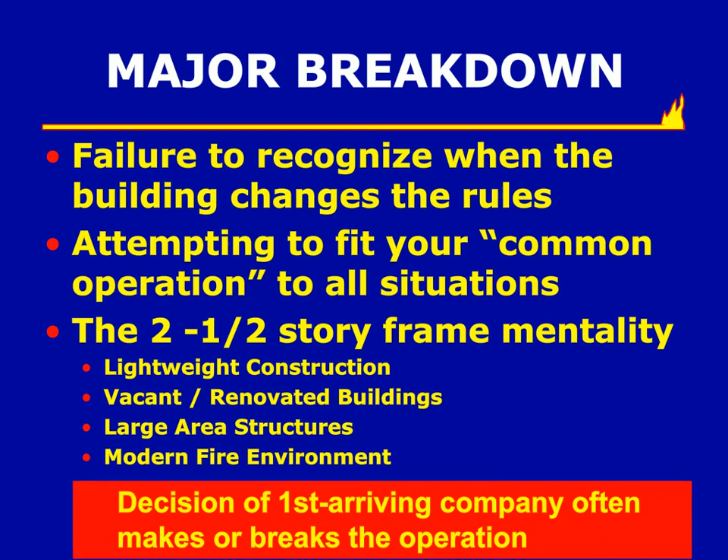So one of the things we have to be aware of, and you might be a chief officer and understand all these things, but you're not going to be the first one on the scene. So your first arriving company officer is the one that's going to have to recognize this, and his decisions are going to make and break the operation. I like throwing little sort of pull quotes out, and this is one that I really like. Doing things the same way all the time might get you killed some of the time. Your job as a fire officer and a firefighter is to recognize the buildings that change the rules of the game.

So now how do we start to recognize this? We want to do that before the fireground. And one of the tactical breakdowns that occurs is a failure to familiarize with your district. Construction, especially renovation. I mean, you should see these things when they're happening in your district, unless you're turning a blind eye or you're more interested in your cell phone in the jump seat. Get inside these buildings, take a look at them. For instance, we're going to look at this building here.

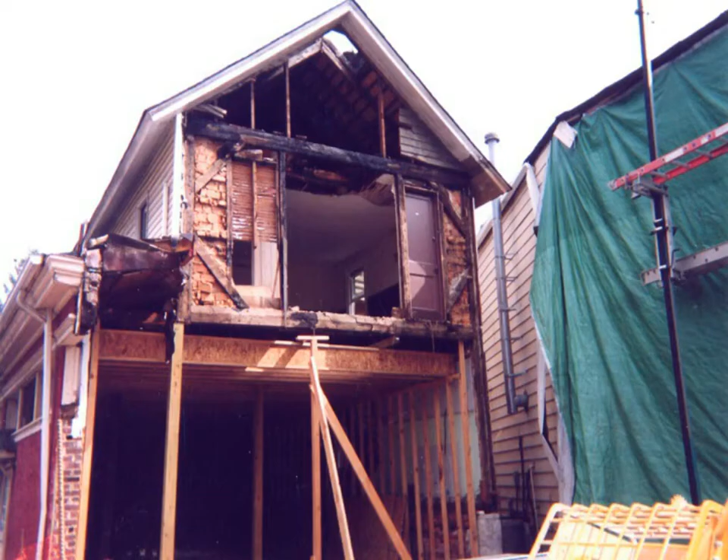However, if you had looked at this building before the renovation was in place, you would have seen that the back of the building and the front of the building is attached to what we're looking at right here. The back of the building had a fire. It was a brace frame building, and the second floor is now being held up by wooden I-beams. So, this sort of changes the rules of the game.

If you knew this because you were looking at these buildings while they were under renovation, it would be part of your awareness program and your pre-fire planning. This is critical that you know, because of an aggressive interior attack in a building like this now, with fires impinging on those things. And by the way, if we just look back at the slide before, that whole front area right here, that's all lightweight wooden I-beam.

And so the back of it, just seeing what was happening there, you have to recognize that and know that's a building that changes the rules of the game. You go in there with an aggressive interior attack and the fire is impinged on those wooden lightweight components, you may be wearing part of that building. So, again, you have to be on top of this in your jurisdiction.

Other things to look for. Renovations.

Waiting for our slide. Oh, let's push it to the audience here. There we go. All right.

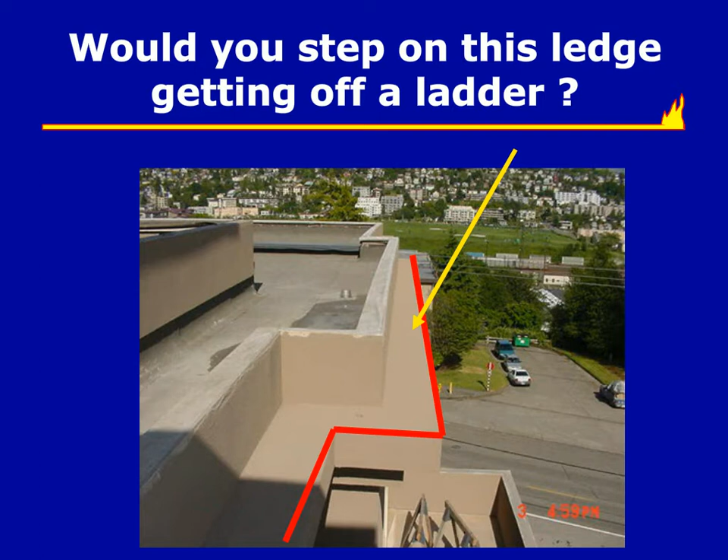All right, so let's move on. The next thing we got to look at is, what are they putting in these buildings these days? And this, again, isn't only old buildings, could be new buildings, could be renovated buildings, but you look at this here and you look at this ledge and you say, well, would I step off a ladder onto this ledge? Well, you might, except when you take a look and see what it looked like before it was painted over, it's actually styrofoam.

And styrofoam will have a toxic hazard because it doesn't burn, but it melts. It gives off toxic gas and it drips. But it's not going to support you. So one of the things you got to be thinking about is paying attention to when you put the ladder up. When a ladder hits that styrofoam, it's going to sound different than when it hits a normally solid wood roof or whatever. And this stuff's being used in a lot of different places out there.

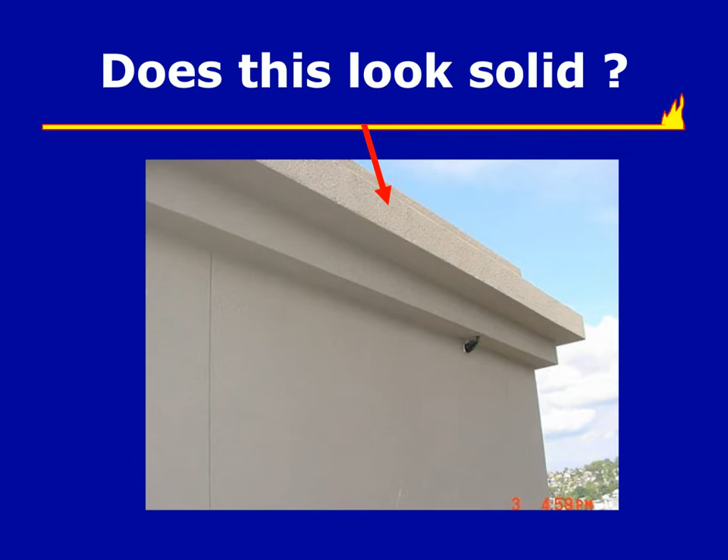And again, this changes the rules of the game because if you get off the ladder in there and step on it, you're going to fall. So you have to be aware of that. All right, some other things we're going to look at. Now, this is something that you want to take a look at when you pull up and you do your size up. You look up above that roof, you see what appears to be a pretty large parapet wall. And in reality, what you got to be thinking there is, what's being hidden back there? Right? Why is that wall there when it was never there before? Again, seeing that go up, you'd want to do some investigation.

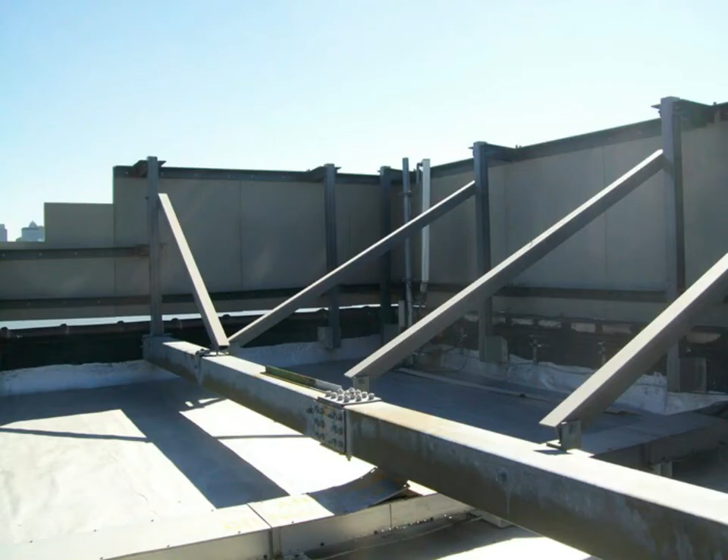And what are we looking at? We're looking behind the wall now in the next picture. All right, now we're behind the wall. You can see that wall is not brick at all. It's actually some flimsy sort of panel board. I could probably throw a good taekwondo kick right through it, back kick.

But this here, if you look at it, this is all HVAC equipment that's laying up and all over this roof. So what was happening in some of these buildings was they were not allowing them to put the HVAC equipment directly on the roof because of the roof load, and if a fire got through the roof, it caused the roof to fail a little earlier. So they came up with the brilliant idea to put it on an I-beam and then mortar the I-beam into the parapet wall. The unprotected steel I-beam that is susceptible to expansion from heat into a freestanding wall that is susceptible to collapse to begin with. So you see what these renovations are doing to your buildings.

So let's take a look now. Now, this was in Weehawken. In Weehawken, they don't allow this anymore. But up in North Bergen, which is, again, one of the cities that we protect, in North Hudson Regional, we cover 5 cities. We cover North Bergen, West New York, Weehawken, Union City, and Guttenberg. We have about 70 or 80,000 people a square mile. We never have a fire without an exposure problem. It's always rush hour. So it's always a challenge.

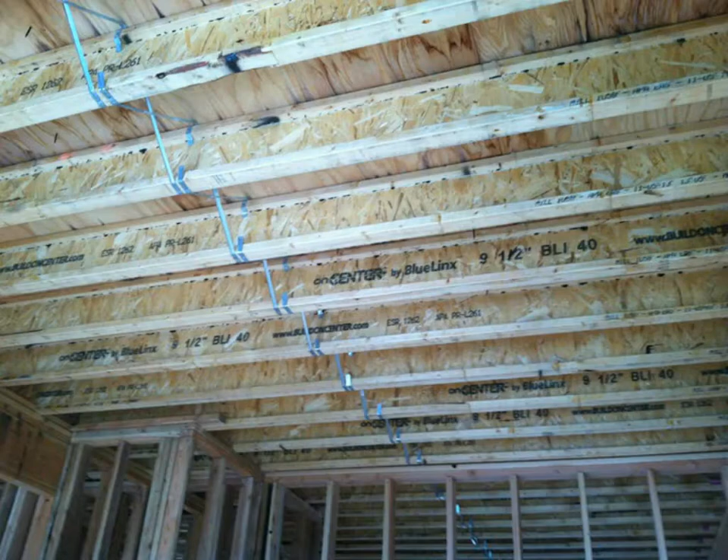And that building has since been renovated, and this is what we have now supporting the roof of that building. I don't know if you're seeing this. There we go. So we had very nice, solid wooden joists in that roof in the beginning, before the fire, and this is what we have now. The entire roof is constructed of wooden I-beams supporting, this actually looks like plywood. Most of the time it could be particle board, but this looks like plywood.

Anyway, again, not knowing your buildings, another top floor fire, maybe we can't work on a roof for 40, 45 minutes like we did in the previous fire. In fact, not only maybe, but we can't work on that roof. And again, you got to know your buildings. So you get a fire in a building, 99% of the time, if that building's not going to be demolished, they're going to be renovated with lightweight materials, and it's your responsibility to be out there and take a look at that. All right, let's move on.

If your department doesn't have an SOP on this yet, you should get one. You don't want to wait until the fire to try and figure out, well, what should we have done? You want to be looking at what we can do and what we should be doing way before thinking about what we should have done. So you want to adopt an SOP in regard to solar panels. I have a little blurb on this here that I got through one of our captains. I'm not sure where he got it, but it's some pretty good guidelines to utilize operationally.

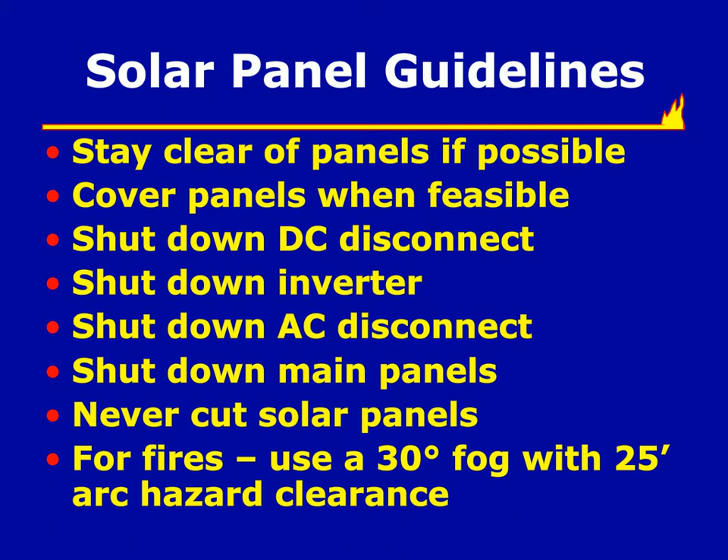So one of the things we did there, same thing with the 92nd Street fire, the alarms didn't go off there either because the fire was in a cockloft. What we did was we manually pulled an alarm just to notify everyone. Anyway, to us it looked like this fire was through the roof when we pulled up, and we struck a second alarm right away. We had the report of the smoke on the top floor,

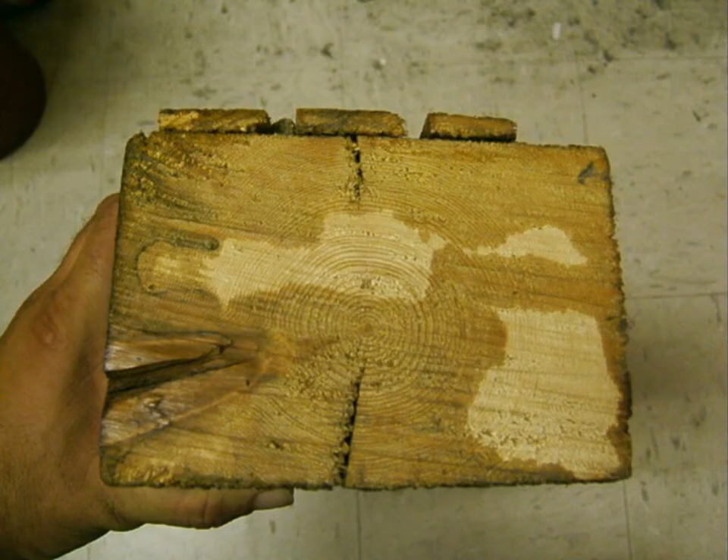All right, let's move on now. Now we're going to talk about another tactical breakdown: the failure to recognize or respect the presence of truss or lightweight construction. All right. Now the first picture we're going to see here is, and I always ask questions in my classes, which I can't do here, but this is a piece of wood from a brace frame building, and this building was well over 100 years old, almost 140 years old.

And if you look at this piece of wood, the rings are really tight. The wood's got a lot of mass to it, and this is what they call slow growth wood. This is the way God intended wood. It grew in a forest, and it wound up in a building. But the thing about this, it happens to be a little bit wet, but there's very little moisture in this piece of wood. So any warping or anything that happened to this piece of wood has already happened,

And what's happening is this is what's in our buildings. And while it's in your buildings, it's drying out. And as it dries, it's warping and twisting, and it's being held up by suspect support mechanisms like glue and sheet metal surface fasteners or gusset plates or joist hangers. So these things may be becoming unstable even without a fire due to shrinkage and that sort of thing.

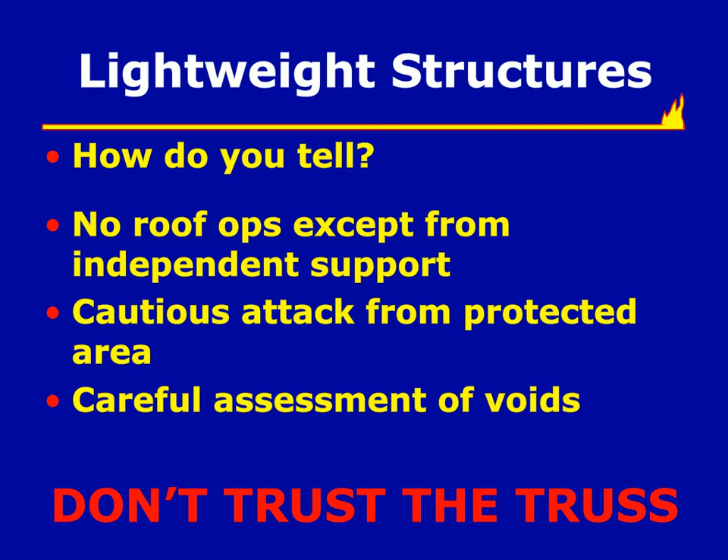If the answer is yes, now our next question is: is it involved or is it threatened? And as an incident commander, you probably can't see that. You maybe can see it if there's smoke coming from voids or something, but you need reports. Now, if the answer is no, we're going to increase supervision, put chief officers inside. We're going to operate cautiously, continue to monitor the voids, and reinforce the operation based on conditions.

If it is involved, we are then going to withdraw from the area or the building, and we're going to prepare for a collapse. Now, that doesn't mean we have to lose an entire condo complex. That means we're not going to work in the area of origin. We can consider a stop point based on where the fire is, the building layout.

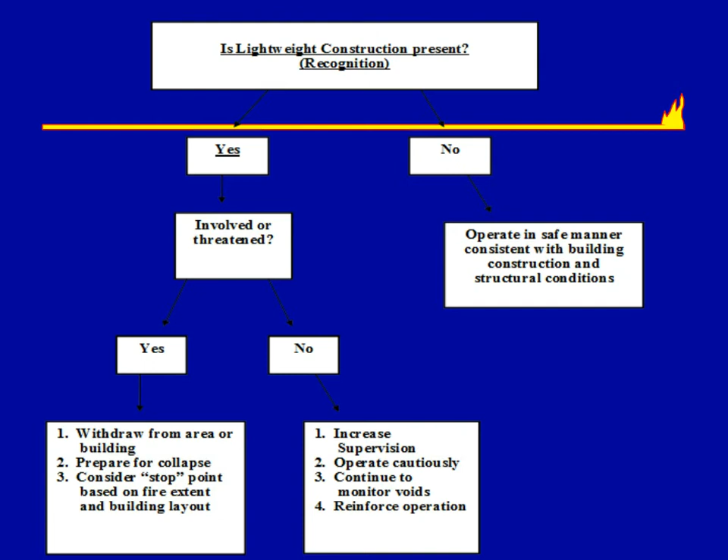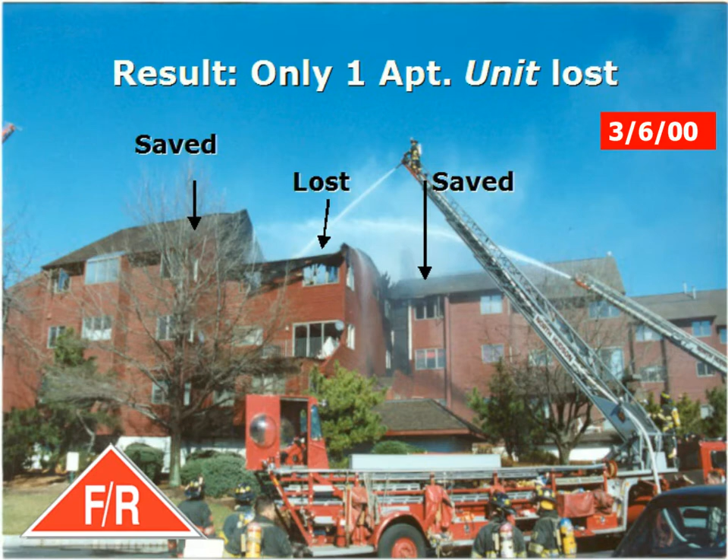And what I saw was 3 floors of heavy smoke with fire breaking through the wall on the D side of the building, between the floors. So right now we're looking between the floors. That's a void. I know that's a void, so we immediately have to start thinking this is going to be very similar to the fire we had the last time. And I basically used the same strategy there, right?

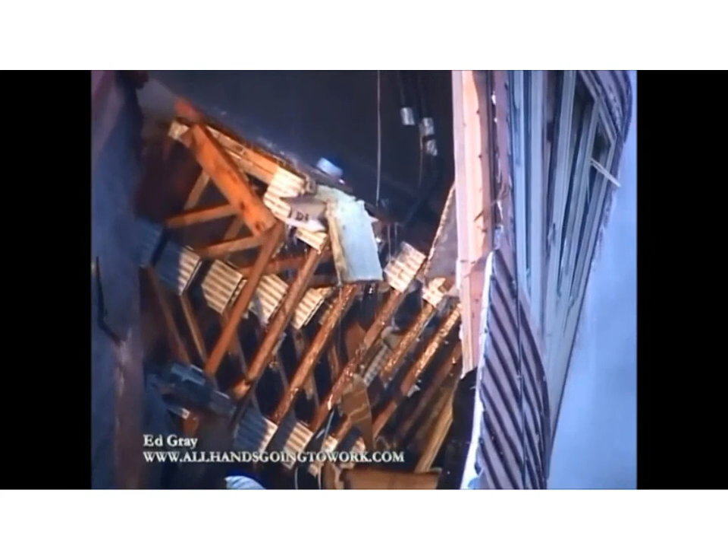Sorry to interrupt. The audience cannot hear you. Sorry about that. Okay. No problem. Can they hear me now? Yes, sir. Let's move on.

All right. Before I get into wooden I-beams, I just want to talk about that video a little bit. You could see how that building collapsed. We already had sort of a lean-to collapse on the second floor, and you saw how the third floor collapsed and just dropped 3 floors down to 2 floors. We weren't anywhere near that building. We were well out of that collapse zone. Again, we were pinching it off in the Delta exposure and the Bravo exposure, and it was successful.

It was successful, but the key to that is to continue to monitor your voids, because if the voids become involved and you can't keep that fire out of there, you're going to have to abandon those as well. All right, let's move on. Wooden I-beams. Again, Rock Harbor, which is that complex that we just looked at, was truss. A lot of the buildings being built today are also being built with wooden I-beams, which are definitely no better. They're used in floors and roof construction.

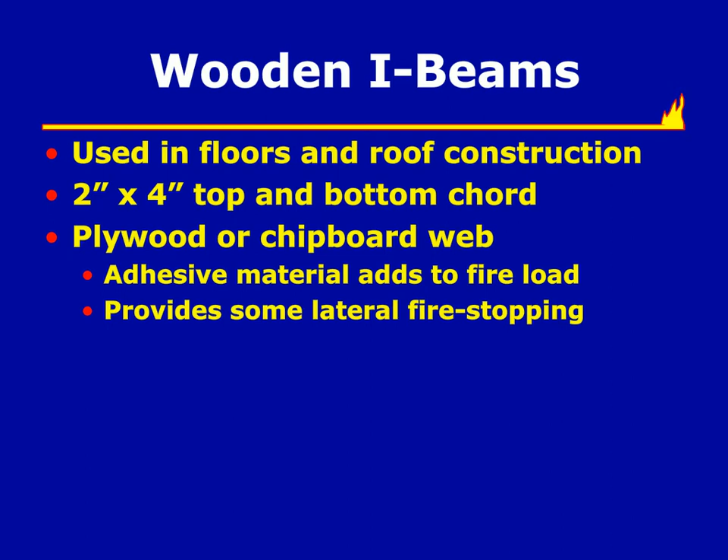They have a 2x4 top and bottom chord. Sometimes it's 1.5 by 3, more likely. Plywood webs are not being used anymore. It's more a chipboard or an OSB web. Now the adhesive material in there is going to add to your fire load. It's going to burn through very, very quickly, even though it does provide a little bit of fire stopping. Again, a 5-minute collapse potential on these things. I like to say they're nothing more than sawdust and glue being held together by 2 chopsticks, because that's basically what they are.

If you really want to take a look at them, the size of the web in the center, if that's a very big web, they're probably a little bit longer. Normally they're about 20 feet long, but these will collapse without warning. They will collapse without warning, just like the truss. It's not like a steel I-beam.

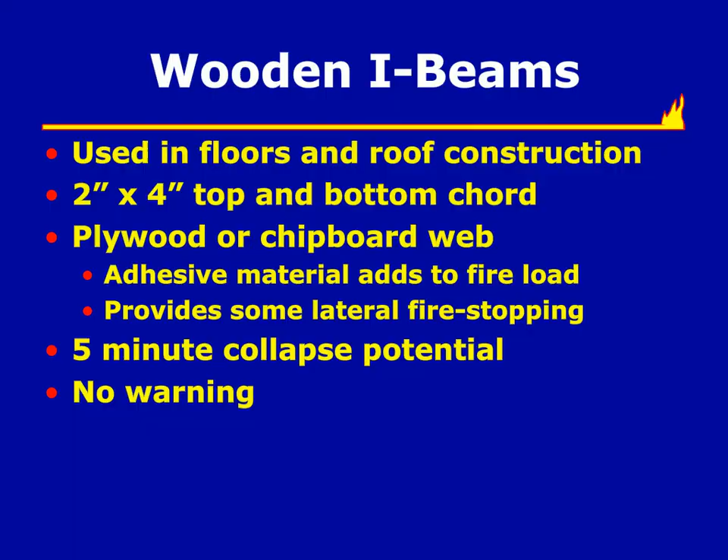And you have to take a look, what do we have in these buildings? Unfortunately, in New Jersey, and I don't know if it's this way in Florida or New York State, these don't require the truss sign because they're not trusses, although for us they're basically the same, right?

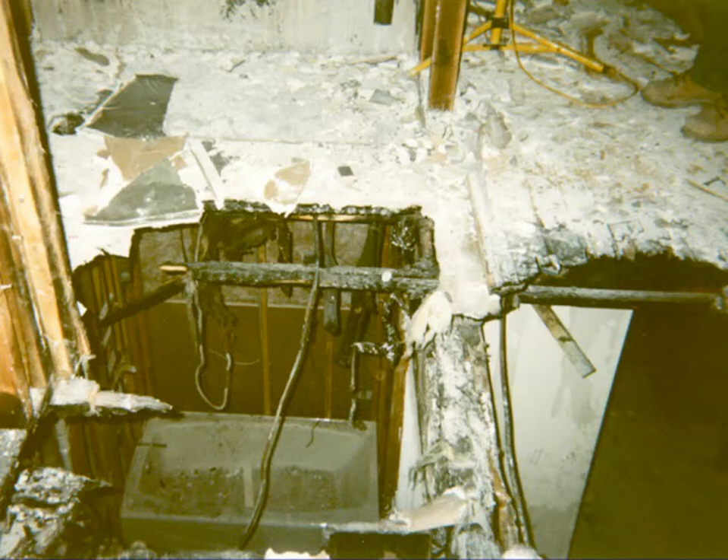This was a fire that we had in a building under construction, and this building had lightweight I-beams as floor supports. You can see the one directly in the center of the picture. There's one to the left, and there's another one that you can't see. There were 3 of these burned away before we even got on the scene. It was about a block from the firehouse.

It was a verbal alarm early in the morning, and for these guys, they did the right thing and they knocked it down from a distance, which is what you want to do. Knocked it down from a distance, and you could see the kind of damage that you had there. And there wasn't even any real floor loads on that just yet because the building was still under construction. So, wooden I-beams, they're all over the place. They're extremely, extremely dangerous, right?

And again, anybody who's got a little time in the business, you should have seen these things going up on your watch. So if you don't know what they're made of, shame on you. But these type of buildings, they are full of glue-based materials, and they burn like there's no tomorrow. Yeah, anybody who's had a fire in one of these buildings, you're gonna know that. Once the fire takes a hold of the structure, once you flash over and it gets in the voids, it's over. We don't save these buildings.

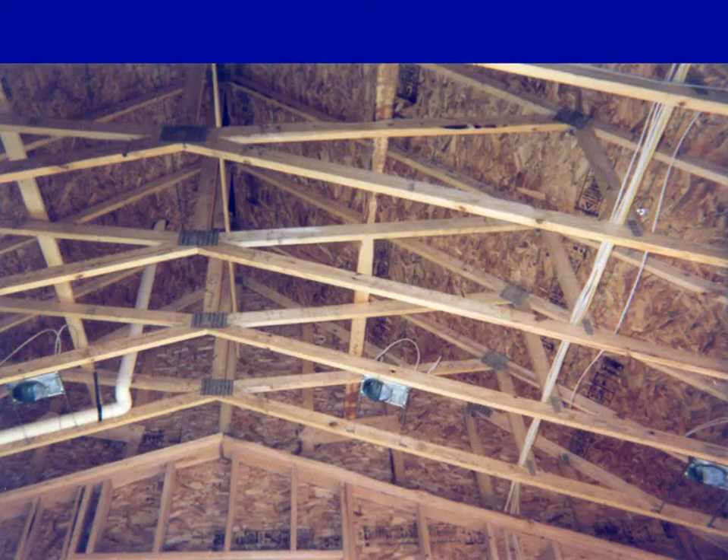I saw a video where a bunch of guys were in here too long and the whole back of the building collapsed, and fortunately for them, they rode the collapse out. But there have been other people that haven't been so fortunate, have been killed in these buildings. They're big buildings, they're large areas. You should be working in there with lifelines. You should be operating from protected areas, and you should be of the mindset that the building is completely filled with voids. And a fire that gets in any void is going to get in any other void in this building. Here's your cathedral ceiling void right here.

You can see the particle board roof, all right, up above. And here is another shot of it just from the side. And you can see that particle board. I mean, you look at that stuff, sawdust and glue. You know, if anybody's ever been in a flashover container, that's what we line the walls with. But you can look at all these voids in here. There are closet voids, there are chimney voids, there are floor voids, there are bathtub voids. They're all over the place.

You get a good fire in one of these places, and again, a lot of these are in areas where there are longer response times. Maybe they're not career departments, and it's an even longer response time. By the time you get there, unless there's an interior sprinkler system that didn't allow it into the voids, which is not necessarily uncommon. You know, these buildings, they're killers. They're firefighter killers. They're trusses, they're lightweight I-beams, and we don't belong playing in them for any long period of time.

The other thing that happens in these buildings is the top of the building, up in the attic. You never saw this in any other type of building unless it's been renovated, except in these newer buildings. Now you can see the trusses clearly, and they don't really look like 2x4s, do they? The key to these things will be on the outside. How many compressors do you have? If you have 2, 3 compressors, consider you're going to have a 2 or 3 zone system, and you want to ask the owner where these systems are.

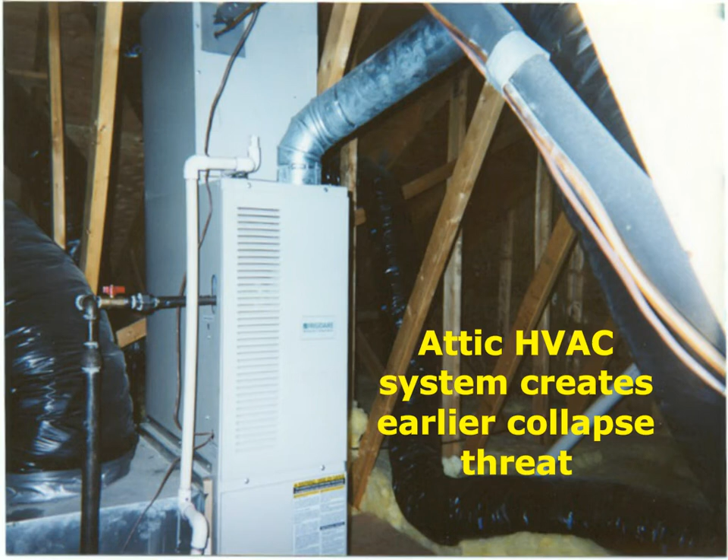You have a good fire on the second floor, and one of these things is up in the attic. It's pretty heavy. It could lead to a much earlier collapse. So, again, something we have to be aware of. This is, again, buildings that change the rules of the game. We can't fight fires in them like we normally fought fires in the buildings we have been working in for, you know, 100 years.

Steel truss systems. They used to just be in strip malls and warehouses, but they're not just in those anymore. They're using them in areas that we weren't used to seeing them in other times. And the other thing with these things, especially the trusses, it has to do with the codes. How did they get away with trusses? It has to do with the codes.

You have your specification code and your performance code. The specification code said that no matter what, you have to use a specific piece of material. So if we say you have to use an 8x12 solid wood joist, that's the only thing you can use in a specification code. But in a performance code, provided the engineering allows for it and the fire tests allow for it, you can use a piece of dog crap if it holds up, just like what the specification code would. That's why we're seeing all this weird stuff going on in our buildings.

And the other thing with trusses is, why do trusses fail in a comprehensive, domino type hazard? It's because they're engineered to only hold up the areas that they are holding up. Years ago, if you had a legacy roof, a nice solid wood joist roof or wood joist floor, and part of it burned through, that floor's not going to collapse or that roof's not going to collapse. That doesn't happen anymore because when one truss burns through, the ones adjacent to it are not designed to hold up the load of that truss.

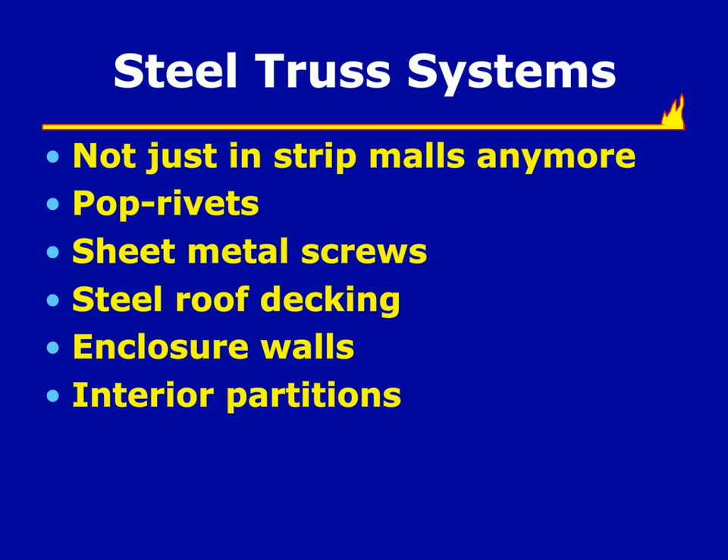Right? So these steel truss systems, they're using all kinds of weird stuff in these things too. Pop rivets, sheet metal screws. We're seeing steel roof decking in places you never saw it before. We're seeing it used in enclosure walls and also in interior partitions. Now, we're also seeing it in places we never saw it before, like private dwellings. These are estate homes, McMansions, whatever you want to call them.

But take a look at these things, and you know what the only advantage to this is? No termites. That's it. Other than that, this building is going to fail, not necessarily without warning. There'll be some warning because there'll be some sagging, but you can't expect this building to hold up under the fire load. The whole thing is exposed steel, and exposed steel is going to be weak at all times.

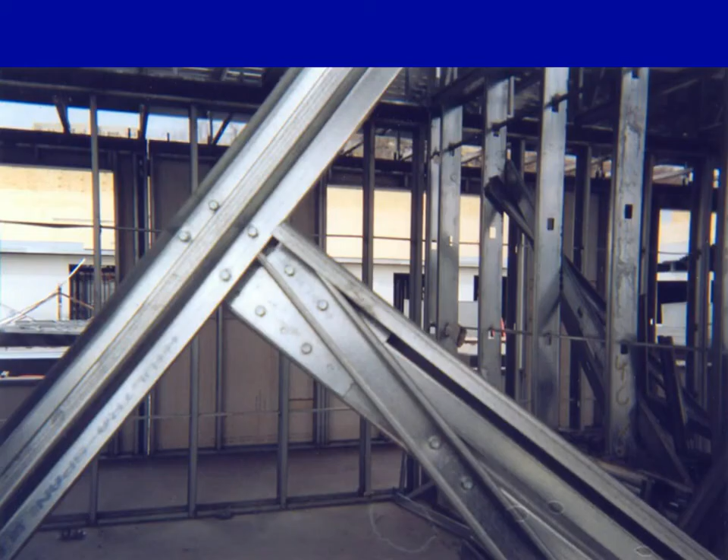Right? This was a townhouse going up in North Hudson, and you can see the interior partition walls of steel, very light gauge. This was one of the roofing structural materials in this building, and it was laying on the floor, probably about 25 feet long, and I could lift it with one hand, and it's just being held together there with those sheet metal screws.

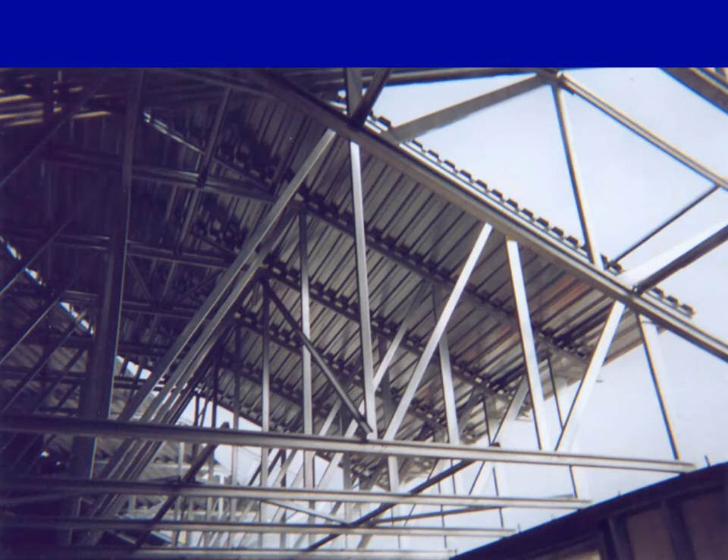And what they did with it was they put it up in the roof. You see it up here in the roof, and this is the first time I saw corrugated steel decking on a peaked roof. These are in condo complexes on the Hudson River.

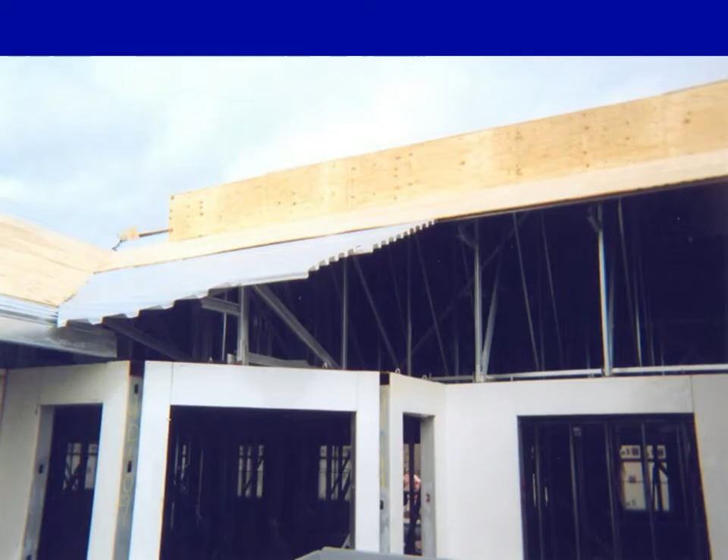We see it a lot more now, but this is the first time I ever saw it. And here's another shot of it here. But what they did was they just cover it with plywood, and they cover it with asphalt shingle, and it looks like any other roof. You can see the size of the truss loft in there, and look at how thin those steel supports are

for that roof. Again, these are buildings that if you don't know what's going on in these buildings, if you haven't seen them when they were going up, this just sets the stage for disaster when we try and fight it like we fought the 2.5-story frame. These are just dangerous, dangerous buildings.

And the other thing is, and this is what happened in Edgewater too, those voids up there are not sprinklered. We don't sprinkler the voids. Unless your code calls for it, which most don't, we sprinkler just the living areas, the common living areas. We don't sprinkler the voids. So just like what happened in Edgewater, once the fire gets into the voids, you got a big problem.

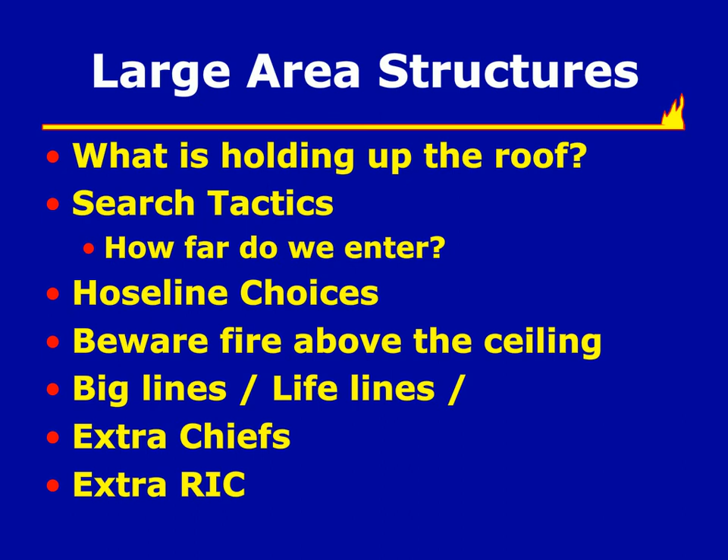These are what is required for large area structures. Plus, you got to pre-plan these buildings. You got to have an idea of what's in them, how to access them, what the idiosyncrasies are of those buildings, right?

You know, statistics don't lie. Twice as many LODDs in non-residential as in residential. And the question has to be asked: do we go to twice as many non-residential fires? No, not at all. Our bread and butter is still the residential 2.5-story frame. That's still our bread and butter. We don't go to twice as many non-residential fires, but we're killing twice as many guys there.

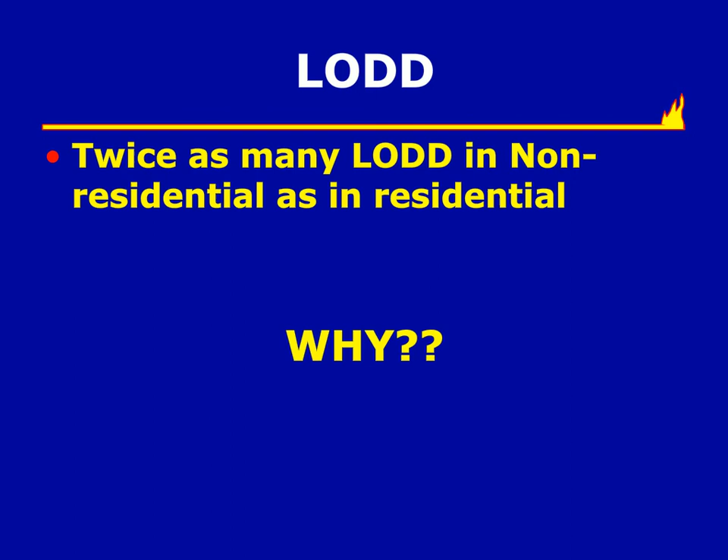And why is that? For the reason we're doing this class. We're not recognizing when buildings are changing the rules of the game, and we are operating with 2.5-story frame tactics, right? And, you know, I hate to be a Monday morning quarterback because that's not necessarily something that should happen in this business.

Trying to get this slide to move. Slide's not moving. I'm sorry, Anthony, which slide do you need? 59. Sorry, folks, we're having a technical issue with the slides. You can just call for your next slide from now on. I'll push them for you. Is it up on your screen? Because it's not on mine. It is on my screen. You might need to refresh your page. If you try refreshing your screen, that might clear the problem. How do I do that? Just refresh the page. Sorry for the technical difficulties, folks. All right, it's working now. Great, we're on slide 59 now.

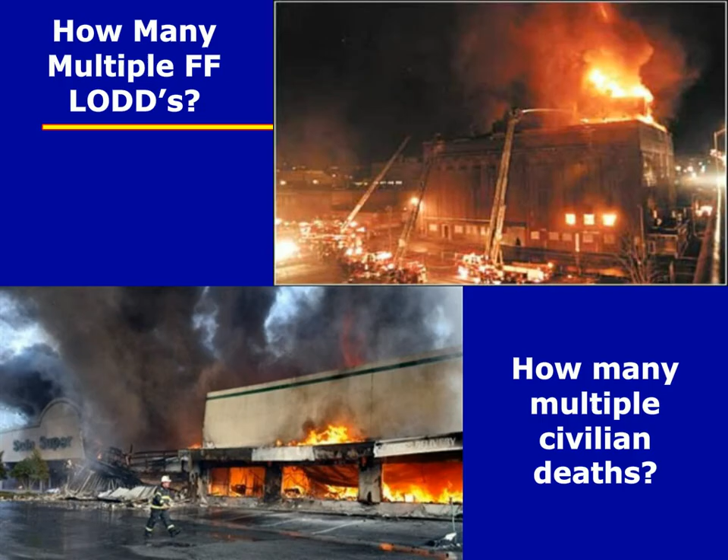I took a couple of seconds about the bowstring truss. The bowstring truss: Waldbaum's, Hackensack, and Cliffside Park, to mention a few. One of the things you got to look at with this building, and this is from Vinnie Dunn's book, he explains it perfectly: failure of one truss will compromise the entire structure and beyond. On the extreme left and right of this building, you have sloping hip rafters, and they are tied into those outside high parapet walls.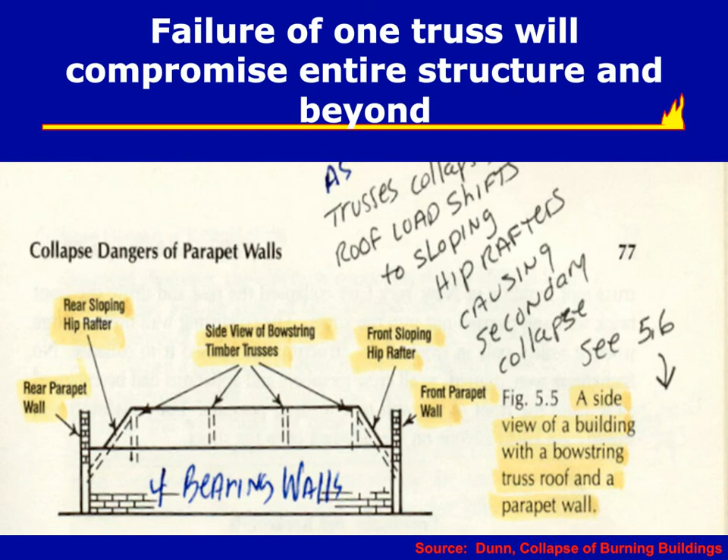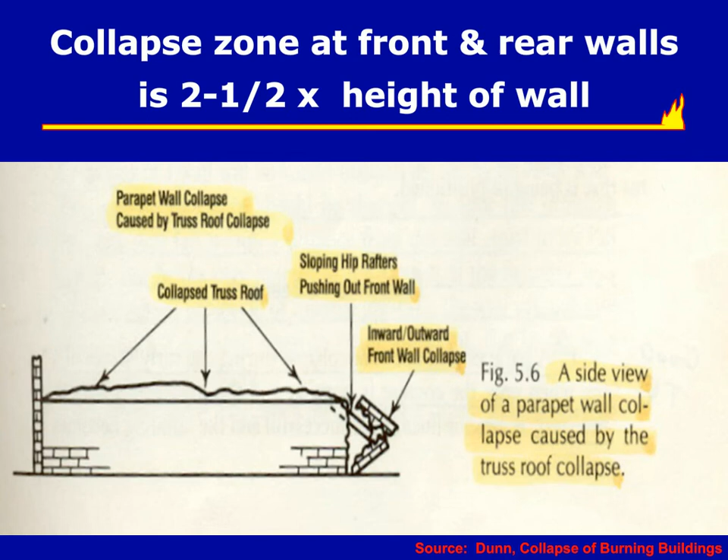These buildings have 4 bearing walls, so if those bowstring trusses begin to fail, they will transfer that load in an explosive manner to the sloping hip rafters, which in turn will generally push that wall out with an explosive force. And Chief Dunn says that should be at 2.5 times the height of the wall as your collapse zone. And out in the real world, this is what it looks like. That sort of sloping roof there, that's what it looks like.

Now, interestingly enough, in Hackensack, the firefighters were inside the building when the collapses occurred. In New York City, they were on the roof, and in Cliffside Park, they were outside. In New York, the roof collapsed. In Hackensack, same, and Cliffside, same, but the walls collapsed as well.

And the key to this is, what are the conditions? I remember seeing a video in Hackensack where you could look straight through the building and see them stretching a line upstairs. And once the camera panned up, you saw heavy fire in the roof area. Fire in the truss areas is always going to be a reason to get out of the building. We have to monitor. We have to make sure that fire has not entered those truss areas, because that's going to be our key. That's going to be our cue. Fire in the voids, fire in the truss areas are where we cannot operate anymore in those types of buildings.

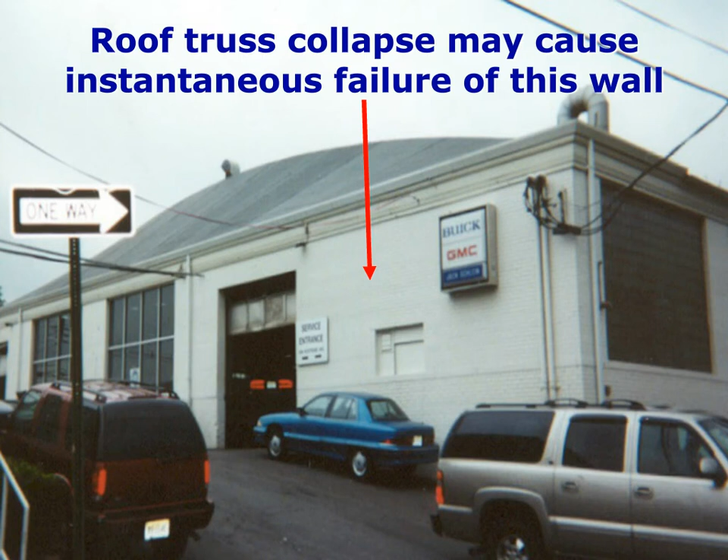So, again, you may not have any of these buildings in your jurisdiction, but if the jurisdiction next to you or surrounding you that you mutual aid to has them and they have a fire there, you're going to be there. Same thing with a high-rise, same thing with a condo complex. Nobody works without mutual aid anymore except the really, really big departments. So you have to know all of your building construction. You have to know all about how buildings fall apart, because you never know where you're going to fight a fire. And some of these buildings are in a horrible state of disrepair.

This is a building we had in North Hudson. It's torn down now, but it had a sagging roof, and we went and investigated, and we found there was a broken bowstring truss being held up by a single T-shore, which you see at the bottom of the picture, and right next to it was the roll-up door. Had we had a fire, what's the first thing we're going to do? We're going to force the roll-up door. Had they done that, they probably would have knocked that T-shore out and collapsed that roof. So it was something that we made sure everybody knew about through safety memos on our department.

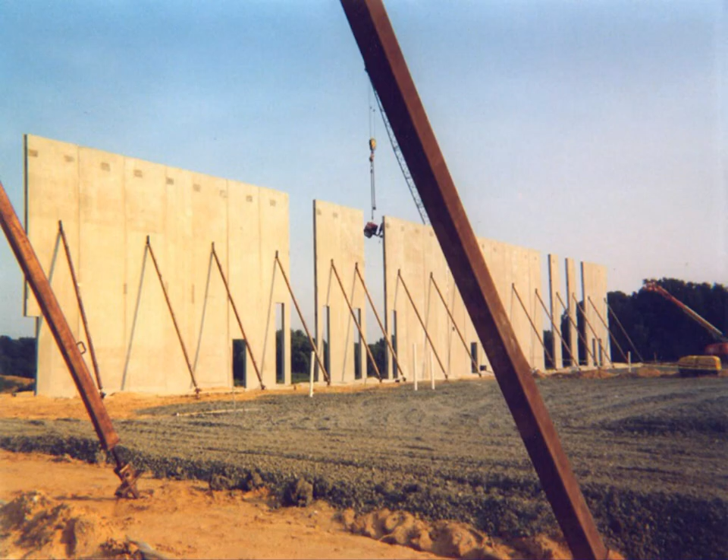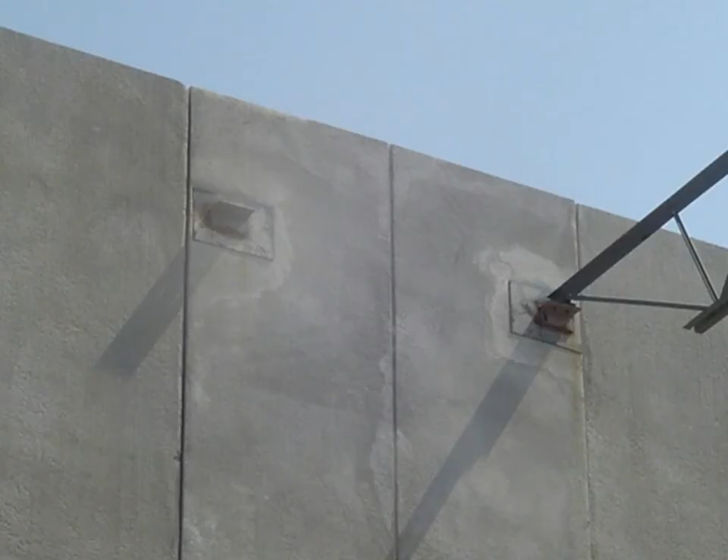Other large area buildings that are popping up all over the place are these tilt slab or tilt-up buildings. The walls are either shipped to the site or constructed right on the site, and they're being held up right now by single rakers. Actually, not even rakers; they're just single anchors holding up the wall. But the issue with this is what happens to those walls. What holds those guys in place is the roof. The roof holds the walls in place, and what's holding those things in place to the lightweight steel truss? Nothing other than maybe some welding or some bolts. Again, all lightweight unprotected steel.

And so if you have a fire that's going through the roof in one of these buildings, you have to be of the mindset that these walls are going to come down next. And again, these are buildings that if you're not going in with lifelines as a ladder company, if you're not going in with 2.5-inch lines, and you're not feeding fire department connections, you're going to lose these buildings.

Where I work in North Hudson, one of our ladder policies is that for any large area building, the ladder company has a lifeline with them, even when nothing's showing. Because if you're not bringing it when nothing's showing, you're never going to bring it when there's a fire. It's just like the 2.5-inch line. If you're not stretching it at the large area building, you're never going to stretch it when there's a fire. When there's nothing showing, you have to be thinking with a dress rehearsal mentality. You have to be thinking differently when these buildings are involved.

I don't know if you can hear me right now, so I'll talk.

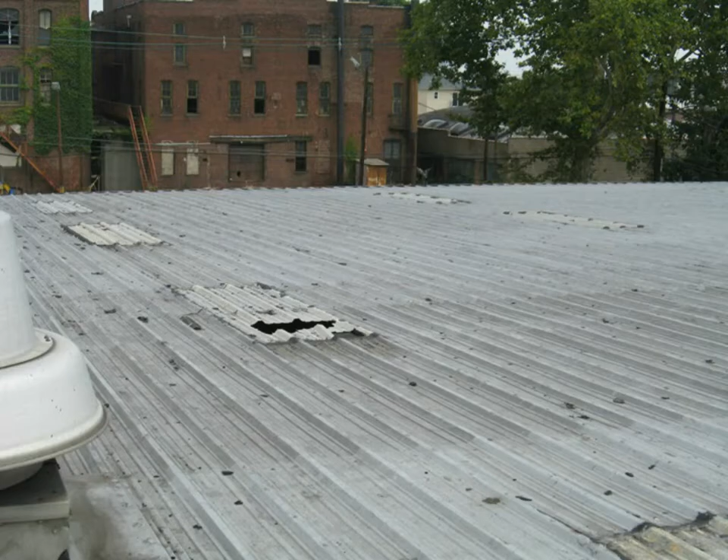Now, here's another thing: wearing this up on a roof. This was in Newark, and my buddy Mike Nasta sent this to me. This was an exposure building. It was at night, and you have to always be aware of your surroundings. This was a large area warehouse, one high story, about 30 feet, and you could see there were corrugated fiberglass melt-out panels up on this roof.

What was happening was the firefighters were operating exposure operations on the extreme right of this picture. They knew these things were there, but because of chatter on the radio, they weren't able to get the information out. So they had the roof lit up, and a battalion chief, who was the safety officer, walked up from the left and started walking towards them. Again, it was nighttime. He wasn't sounding the roof.

Why? Because he's a chief officer. We don't sound roofs. But you know what? We should. I'm not condoning that, right? It's sort of a joke.

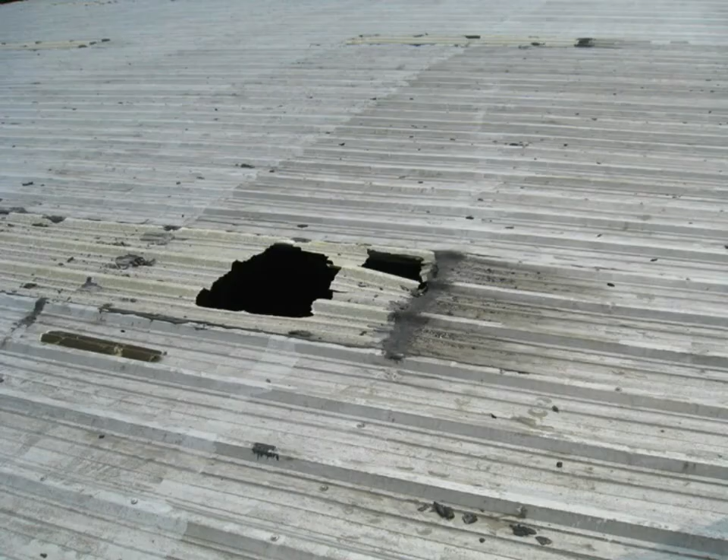But he actually stepped and went right through that hole, fell 30 feet, landed on his back, and his injuries forced him off the job. He was like a 28-year veteran. Injuries forced him off the job.

So, you know, large area buildings not only have dangerous roofs, but they're often pretty high, and you never know what could happen on this roof. And you look at this, this was nighttime. How easy was it to miss something like this? This could have happened to anybody.

The lesson to be learned here is make sure you're always probing on the roof, no matter who you are. Make sure you're probing with the weight on your back foot, because even if you were probing and you had all the weight on your front foot, you're going through that hole anyway.

So large area buildings are just dangerous, and if you're not changing your tactics to operate in these buildings, and that includes when there's nothing showing, you're not going to operate properly when there is something showing. All right, let's move on to the next tactical breakdown.

Failure to stretch the proper size hose line. We talked about that a little bit earlier on, and the other thing is, if you're going to be stretching a 2.5, and this goes the same for an 1 3/4 to an upper floor, don't have every engine on a fireground stretch their own line, because none of them are going to get there.

In North Hudson, we use the first 2 engines to stretch the first line. If we're going to an upper floor, we'll use 3 engines to stretch the first line. Nothing more important than the first line. So if your SOPs call for everybody to stretch their own lines, then smarten up, kid. Get somebody to rewrite it. Everybody should get the first line stretched, especially if it's a 2.5. Get that first line in place, and then you can utilize the other lines.

The other thing is the failure to utilize a lifeline for search. Do you have a policy? And I talked a little bit about the North Hudson policy. You have to have a policy in regard to this, because your guys going into a building like the one I'm going to show you without a lifeline, they're not coming out.

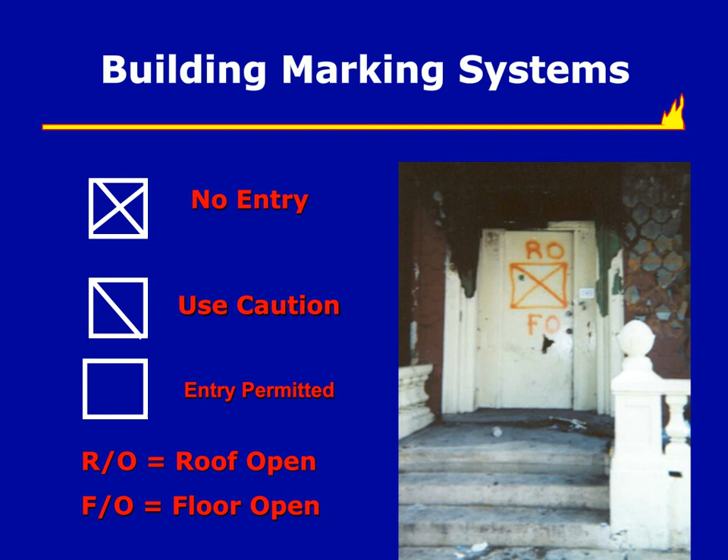So what are we looking at with vacant buildings? We're looking at a philosophy that I like to use. First of all, open them up before you're entering them. Get them open. Don't allow your people to run around inside these places without protection or knowing where the fire is, because chances are the fire is going to find them first. Strict control over operations. Your first alarm companies coming on scene might be there before you. You have to be very, very consistent in the enforcement of your SOPs in vacant buildings.

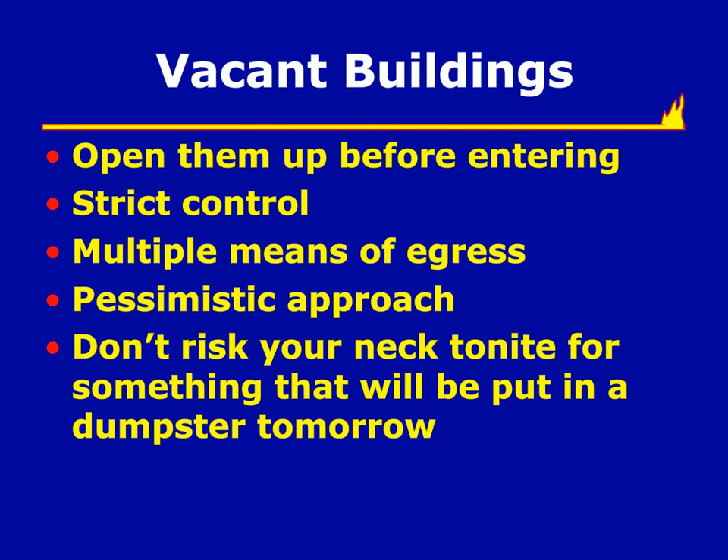Multiple means of egress. Get your RIC team getting ground ladders all over the place and make sure you announce where they are. A very pessimistic approach. And the philosophy you've got to look at is don't risk your neck tonight for something that's going in a dumpster tomorrow. Again, I recognize there can be life hazard in here, and we're going to take whatever action we can if that's the case. But in a very good percentage of these, there is no life hazard inside, and the only life hazard is us. So remember that these buildings change the rules of the game, and make sure you're sizing them up properly.

So what are we trying to get across here? The buildings that change the rules of the game, you've got to recognize them. You've got to know when these buildings are the ones you're looking at from the street. Okay. The other thing is the structural carcass.

Here's the philosophy with overhaul of a building. If no one's ever going to occupy this building again, or for a very long time, we have to really question what we're doing inside there, doing overhaul. That's probably the best way I can put it. A hydraulic overhaul might be the best way to go on something like this, a bulldozer overhaul, but people overhaul in a building like that's a loser. It's a loser. And you have to be careful.